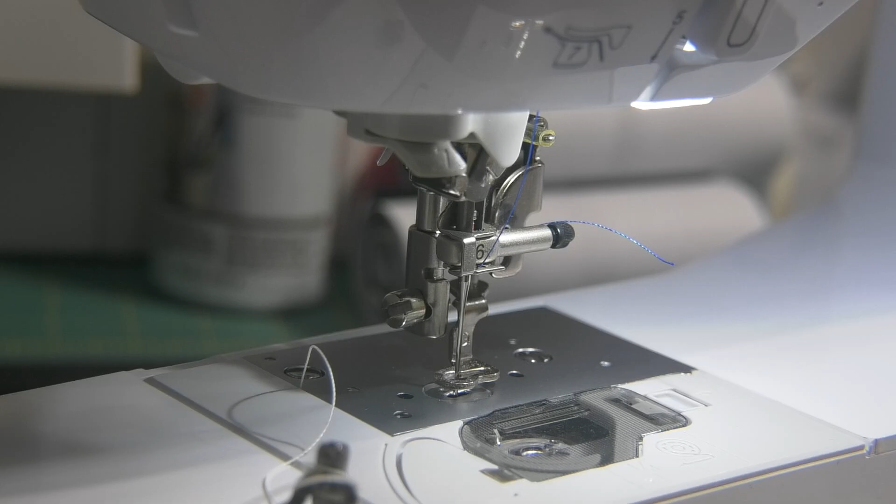Alright, here's my Brother PE900. It's the same as the PE800, which I have on the left. And here's the part we're concerned with. Right here, the thread goes in. The thread goes in, and it gets locked behind this. That's the spring. That's the spring. And that moves, that spring.

All right, now, it moves this way when you pull the thread through. Now, I found when you change your needle, this moves. Sometimes the needle pushes it. When you're putting the needle in, it winds up down here. And it doesn't work when it's down there. It won't hold the thread. The thread will keep jumping out.

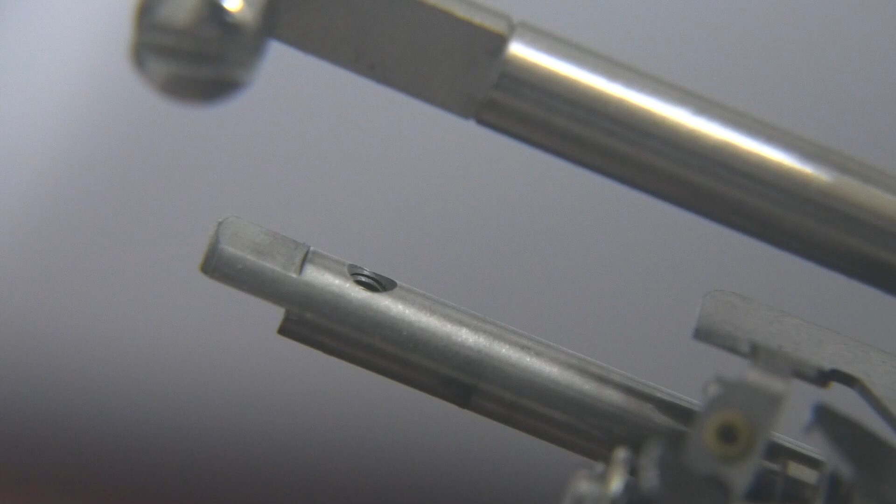Okay, that's where it goes. Right here it goes. And that's hooked to the presser foot. Presser foot hooks onto that. I'm going to put it on now. Stop the camera.

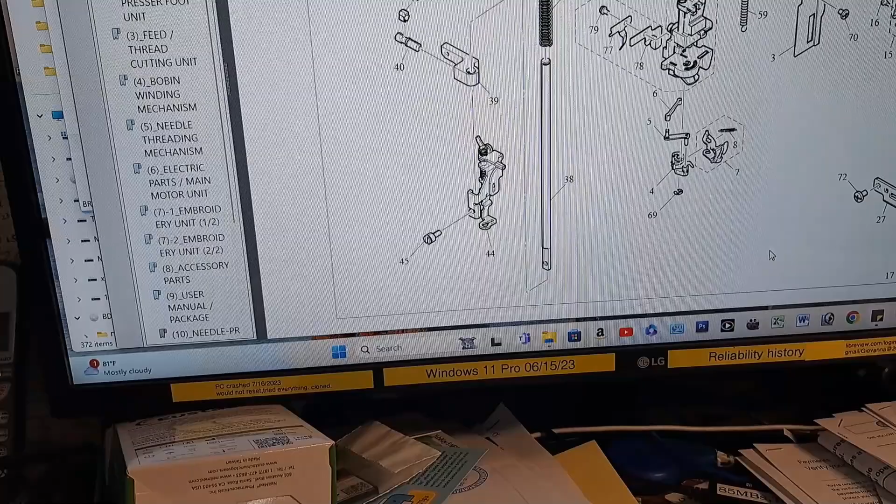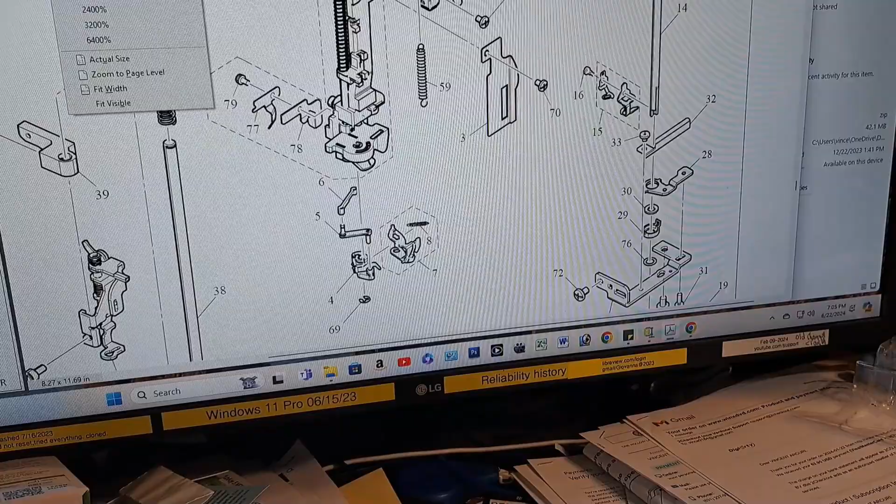All right, here's the part number. It's a thread guide assembly. It's number 15. Enlarge this. Number 15 is this part over here. It's this part. And here's two pieces. Two pieces. I put the part number in.

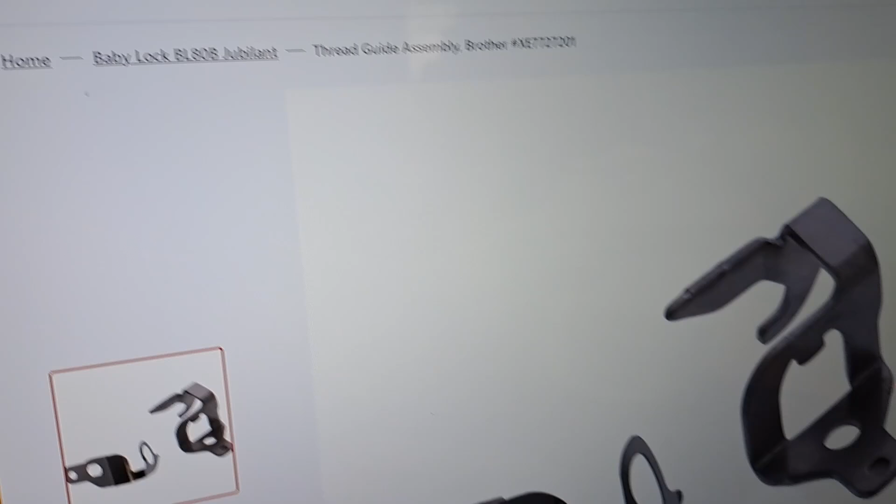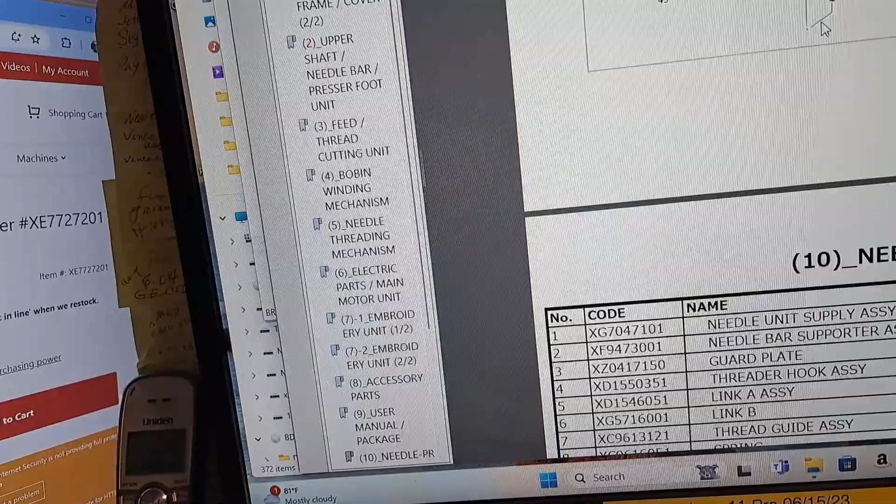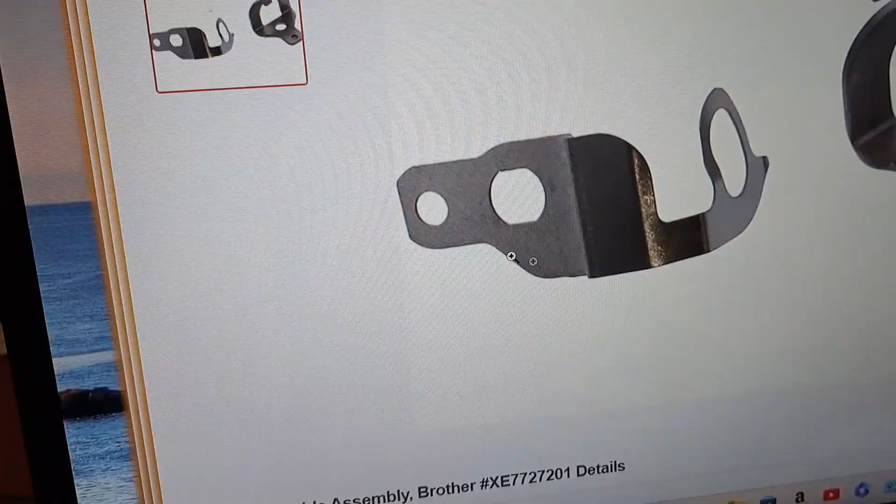Over here, XE7727-201. 201. Actually, this part is 301 here. And over here they say 201, but this is the part. This is the part here. This is the part you need. Now I ordered three of them, and what you get is you get these two things. So in the meantime, I took my PE800 apart, and I'm comparing it to the PE900. It's the same part. I just want to show you how it goes in.

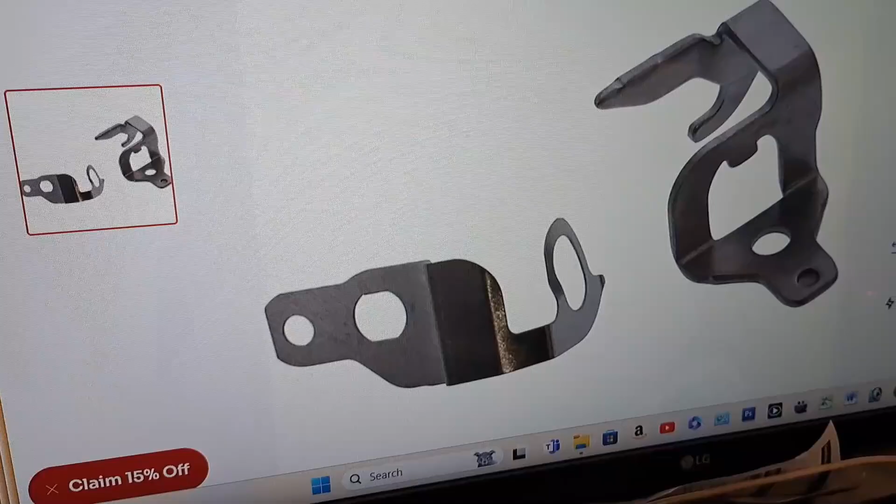The heavier piece of the metal is here. You put the needle clamp in the middle of this bent heavier piece. You will line it up and you move it up to the needle bar until the hole that goes through the needle bar is lined up.

Okay. Now, the bottom of this needle bar, needle holder, there is a piece of metal, the shape of the needle, which is, if you want to call it a half a circle, the flat goes towards the back of the machine. Thin piece of metal that's in the bottom of this solid piece right here. And on the other side of it, that's where you tighten the screw, the black screw that holds the needle up.

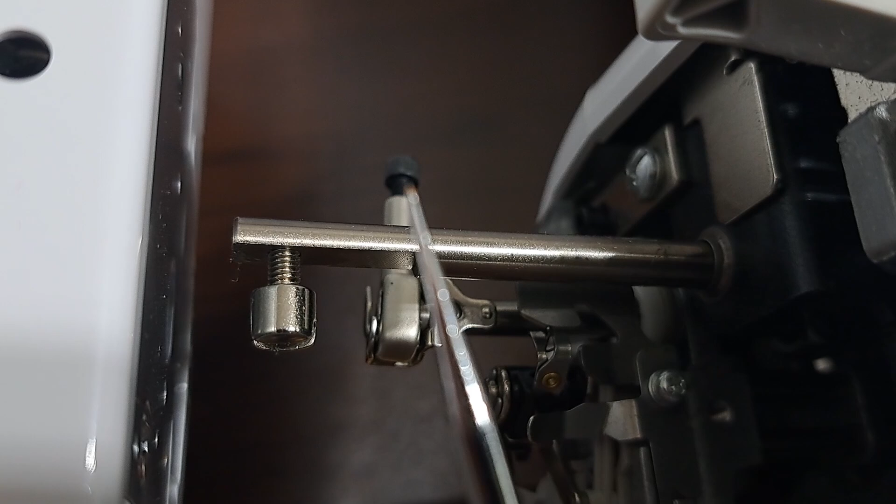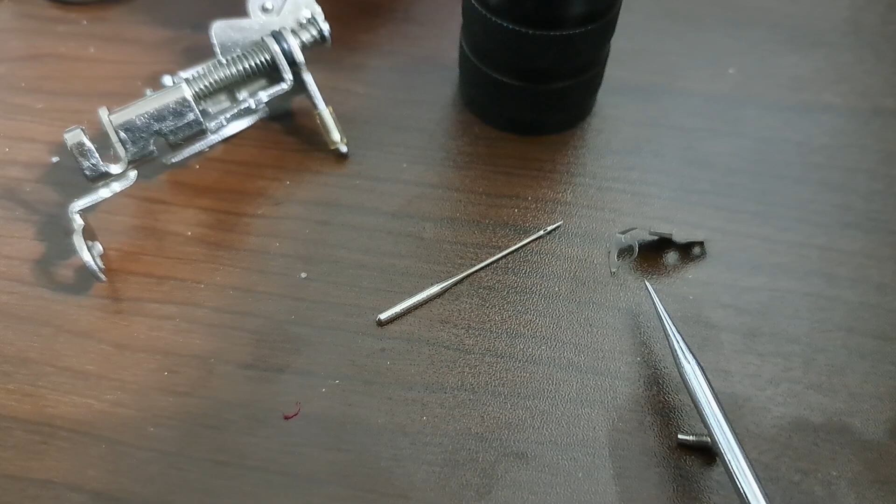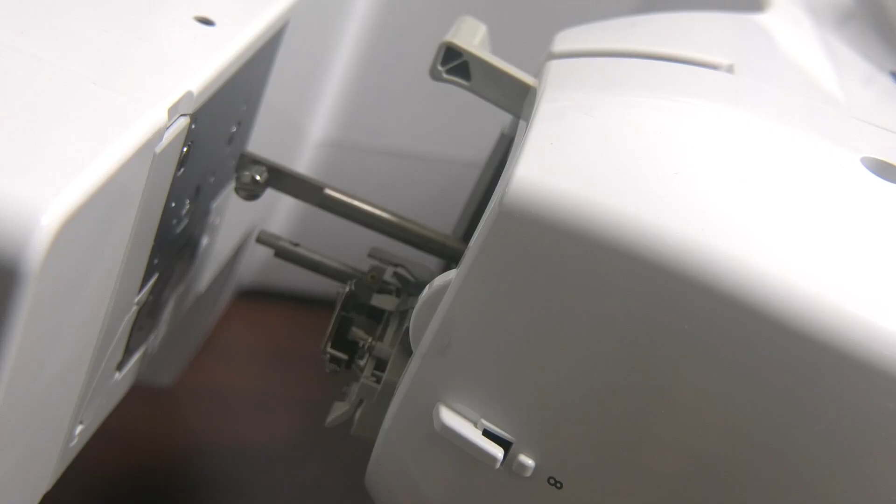Okay, so now the next thing I got to do is I got to put this piece that goes on top of what I just installed, and the screw is into it. Gotta be careful to put the spring in this portion, which is the number 8 thread guide. The reason I took that off is to get access to this screw that holds on the piece I was showing you, the two pieces, with one little screw. I'm going to do that now.

Here's the new needle. And here's the piece with the spring. And that should capture the thread behind it. There you go. There you go. It's back there. All right. There you go. Okay, folks. And now I put back the carriage. Put the carriages back. And that's the end of that.